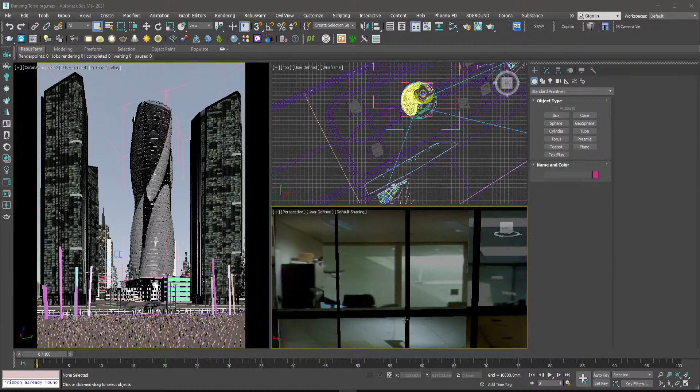Yeah, I'm not sure if this is what we worked on last time. Honestly, I'm a bit confused because I had two versions of these files. One I'm working on for the client, so in case I want to go forward and get it done, we probably will have another version or something. But for the live stream I always had a version too, and that's if it's also original or something. The one for the live stream, I remember we textured some part of it last time, but what I'm seeing now is so different. I'm surprised. I'm just going to continue with the original. I can see we're on the same page with the original file and the live stream file, so I'll just continue with this and probably overwrite the one for the live stream.

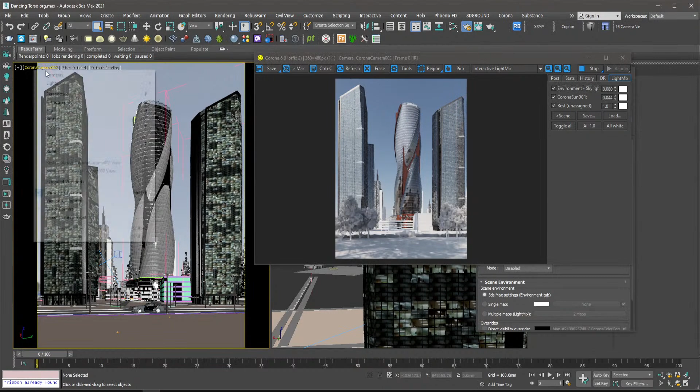Okay, I think maybe I auto-saved it on the file for the live stream. Yeah, this is the one we're working on, so we'll just continue on this. While working on the last live stream, I mainly used this camera. Let me try switching to the other camera to at least see what we have. Okay, not bad on this camera as well.

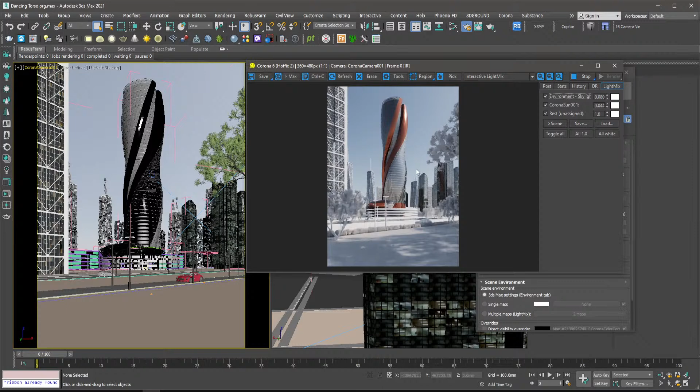Hey, cool, excited about this. It's just something like that. I'm going to texture this building. I think the ones I just adjusted are good for buildings and they're already looking okay to me, so I'm just going to adjust for this guy as well. Now for this other build, let me just stop this so we can talk. This is it. So for this guy right here, this white part, I think I would love to use concrete material for this. I'm just going to open that selection.

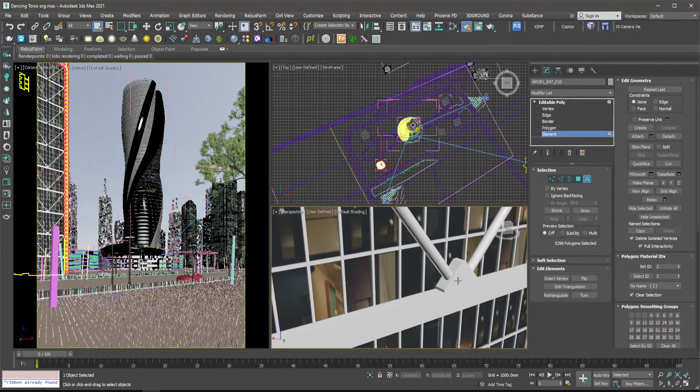So with what I'm seeing now, the concrete and the metal material I have in mind, they are both one object. So what I'm going to try to do is select the concrete and detach, but once I detach, because this object is an instance object, if I make the mistake of detaching this material, it's going to disappear from the other instances of this building. So to prevent that, I'm going to go with a different method.

If you come to this side, I'm going to introduce you guys to multi-material objects. The way multi-material objects work is through set ID. I don't know if you notice it, but this whole object has the same ID, and the reason is because the same material is applied to this and this as well. So multi-material works with IDs. Let me show you.

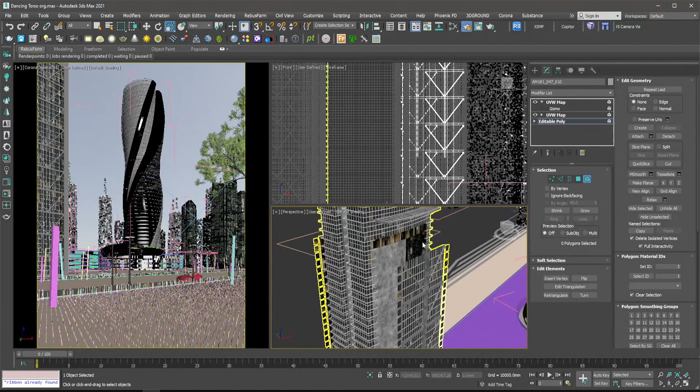Now if we had gone with the decision to detach this because we want to apply concrete here and metal there, if we had detached this, we would most likely have had this area disappear on this model by now. In case you don't believe me, let me try that since we have Ctrl Z. I'm selecting this, going to the UV, the Edit Poly, selecting this, and once I press detach, see, we would have been faced with this issue right now, and we don't want that. That's why we have to go through all that.

And once we are done with that, like I explained when I was starting this project, I will only be using grass, scattering grass models on the foreground. Every other part of the project will only have a grass texture attached or applied to them.

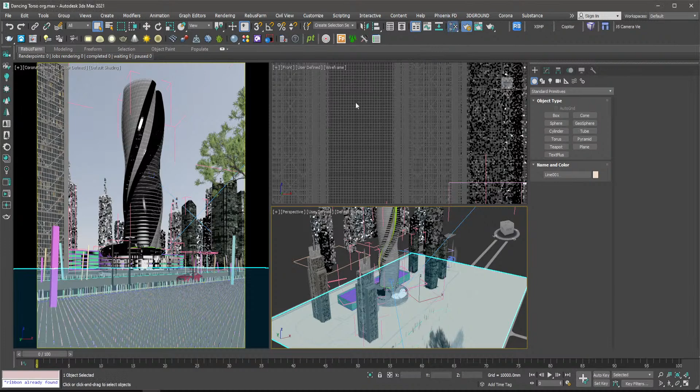So I'm just going to create a grass material, nothing fancy, and I think I have some grass textures I've used in some projects before.

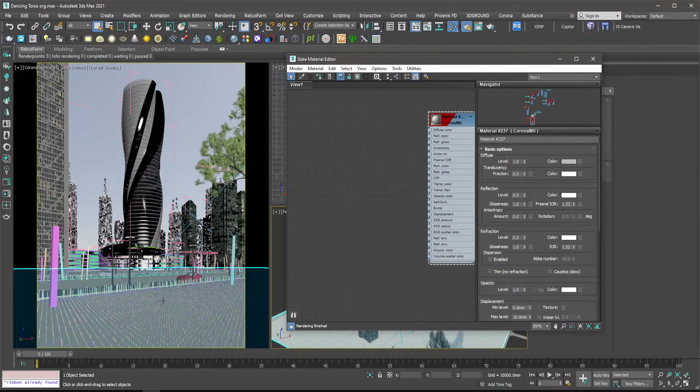We have to be careful of the sizes of our textures as well. If you have something that is not so high poly, by that I mean not 4K, more around 2K is just perfect. You don't need to take it too high, because like I said, these areas are far away. If we were to scatter grass models everywhere, we wouldn't even be seeing the blades of grass in that far area. So why go through all that stress for nothing?

So I'm just going to look for a ground map. I have this one, I don't know, it's looking good, but would it be perfect? Let's see, maybe we have others. Let me see this guy. Can we go with this one? Cool, so yeah, from some of the libraries maybe this guy will work fine. Okay, this one is perfect. I don't want something looking too good, but this guy, okay, I'll go with this one for the ground grass.

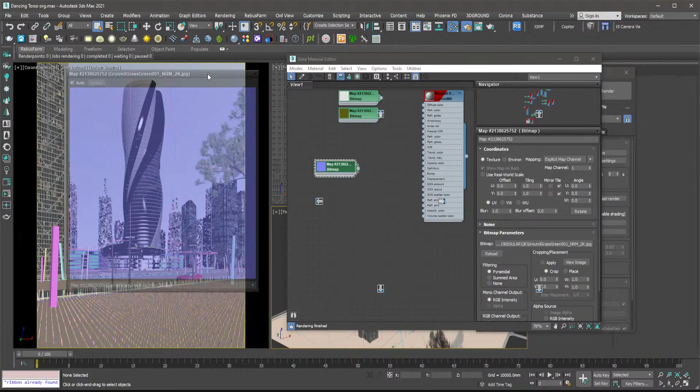Bump map is usually a grayscale map, but normal map looks different and holds more information. If I were to rate them: bump map is a grayscale map, then if you want more detail, normal map, then if you want even higher detail, displacement map. I'd arrange them in that order.

There's a way you can use normal and bump map together to drive a very realistic result. So I'm going to use another technique. For the bump, I'm loading the bump map as well, just to show you guys how it works. And one more, that's the glossiness map.

So we are going to attach this. Now you see how it looks, and you see the work of the normal map.

Just like in Photoshop, this composite map works the same way layers in Photoshop work. It has the same, more or less, mix modes — I don't know the exact number, whether it has more or less than Photoshop — but we use all these modes to mix two textures or something together.

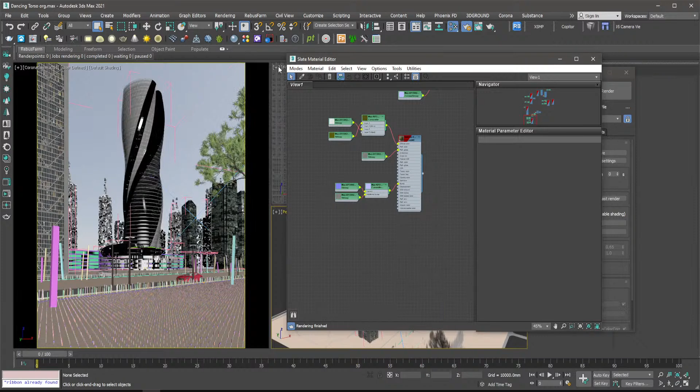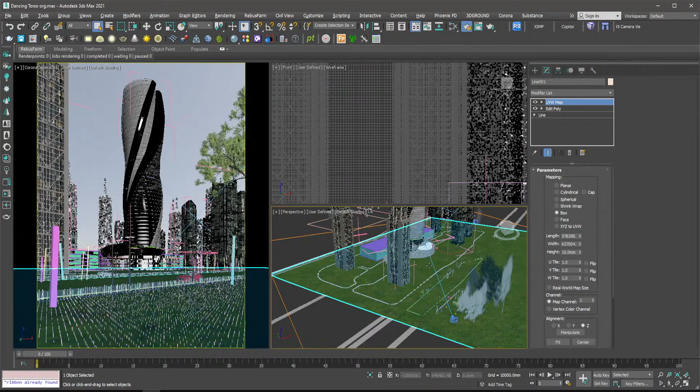So let's just take this back. Well, we have our floor material, so let's apply that. I'm going to apply this, and then I'm going to add the UVW map. So you want to scale this down. You can scale it to this value here, but then I want to be faster with it and stuff. I think this is okay.

Now, one thing I would like to point out, one detail I would like to take, is when you're working on a project and you have these vivid colors in your scene, you end up seeing what we call color bleeding. Like if I have a floor in a visualization, I don't know if you guys have noticed it. Maybe you apply the floor texture to your room, and then after applying the floor texture to the room, your white wall starts looking a bit off, it starts having this yellowish tone or something.

Now that is color bleeding, and the way you can fix that so that you can have correct white and still have that nice floor you want is by using this material called Corona Ray Switch material. I'm trying to remember what the name is on V-Ray, or is it VRay override? Well, I just save this out.

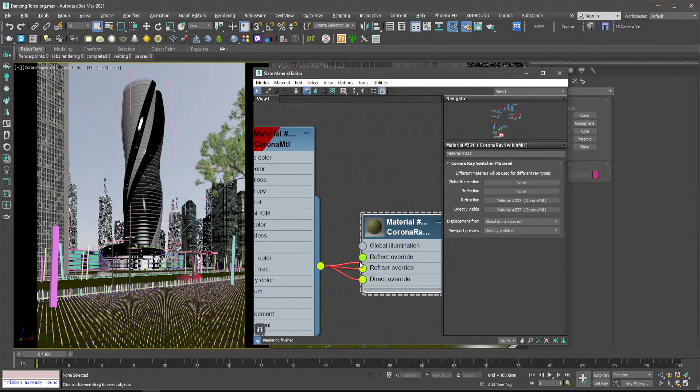So to prevent that, you want to have a different, preferably grayscale material in your global illumination. This is the way to use the Corona Ray Switch material. You put this in your direct override, reflection override, and refraction override. You create a new Corona material.

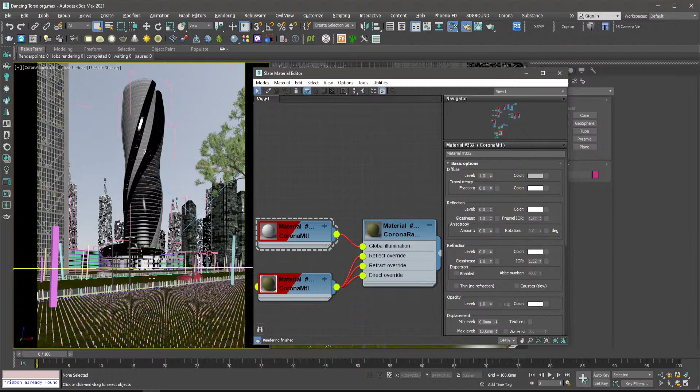You don't need to change any parameter because this is just grayscale, and then you put that in your global illumination. It means when light bounces, let's say on this grass texture, instead of that light taking some of the green color from the texture and bouncing it off, it instead uses this grayscale material, and neutral gray won't have any effect. It won't change the color of anything in your scene.

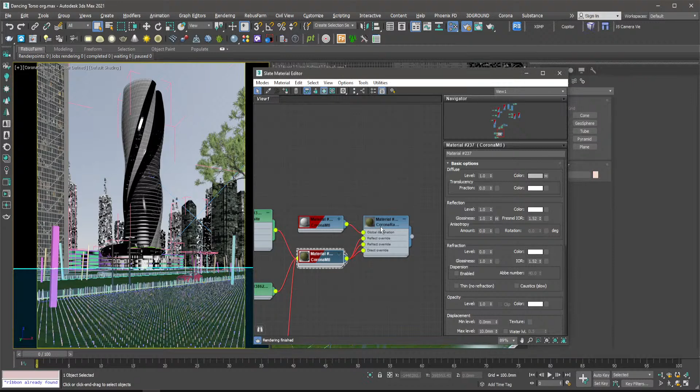So that's a workaround. Now after doing that, because we had applied the Corona material before on this, we need to select that material again and apply the Corona Ray Switch material. It will show up as gray, but you can always select this just to see your texture back.

Now let's exclude the floor, the ground, and make it render just to see what it looks like. Give that some time to load up. Let's see, the red material, is that it?

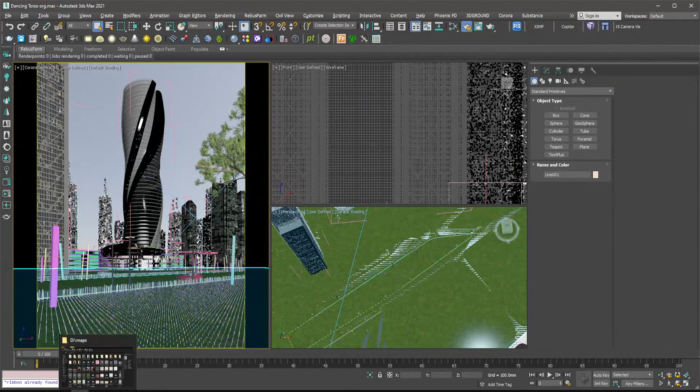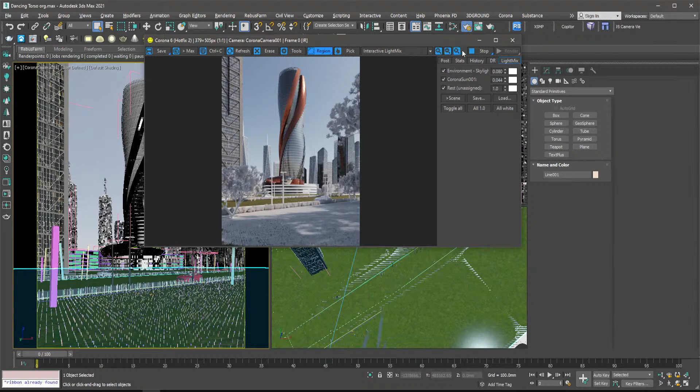Okay, now let me see how it looks on the second camera, because that one shows more of the classic view. Perfect. It's not showing right now because we have our glass, so...

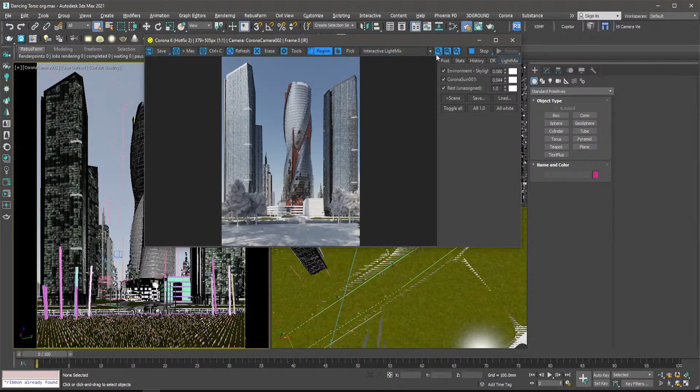I think I'll do the road next. So for the road as well...

I remember the first time I was going to do the road or something, I was going through this long method. I was eager to learn what UV unwrapping was all about, so I was thinking, maybe when I select the road, UV unwrap it, put the textures in Photoshop and whatnot, and it was just so stressful.

And UV unwrapping is no easy thing. UV unwrapping is different from UV mapping. UV mapping is straightforward, but UV unwrapping is like you have a box and you're unwrapping that box. You don't want it to be a box anymore. You want to make it 2D, paint the texture on it, and then wrap it back. It's complex in a way.

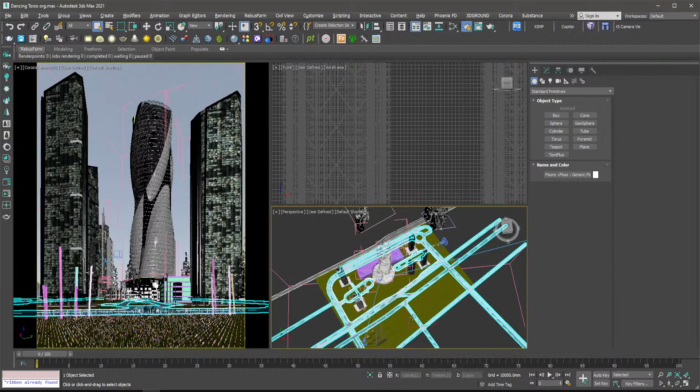It's complex. So what I now found out is that I can just apply an asphalt material on the road, and for the road markings use planes, or other techniques. It's going to be straightforward and easier to do. I'm going to apply plain asphalt on this, without bumps or anything.

Let me go to my map. I think I have some asphalt here. City Street. I just need a plain asphalt road, not one with markings. I don't need markings, just asphalt. Cool.

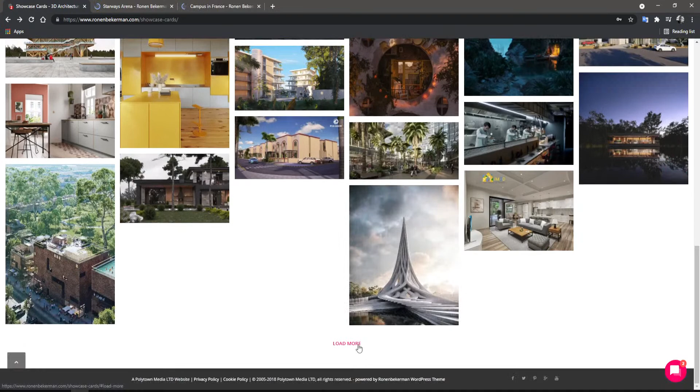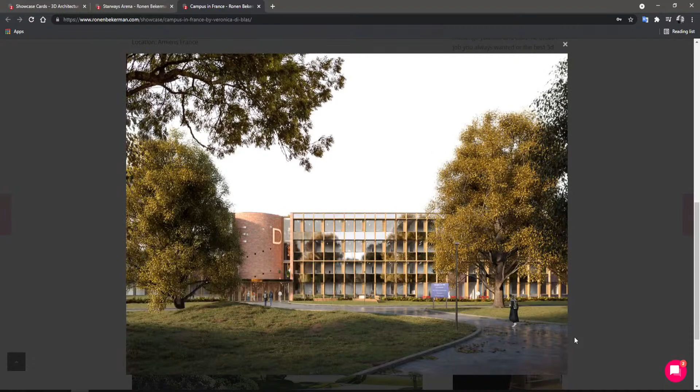I always love an atmospheric render. Though renders with fog and everything looking a bit moody, stuff like that always looks great. I think I've checked this guy before.

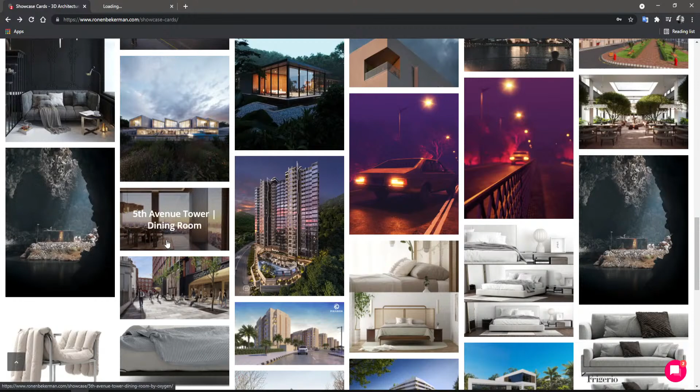This guy's taking forever. It seems to be punishing me for working for so long without saving. That's what's happening. Fantastic. Come on.

Hi, Omega Render. These guys are good. Go see their website. I stumbled upon their website one day and I was so impressed. Look at these guys, just look at these guys.

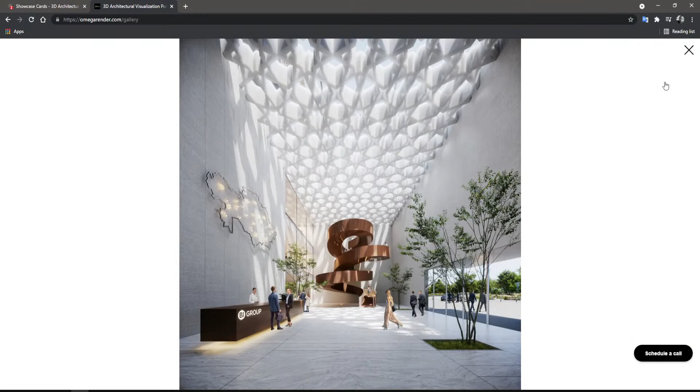Look at these sweet renders. Definitely some photo montage going on here. This could be the rendered elements. Oh my.

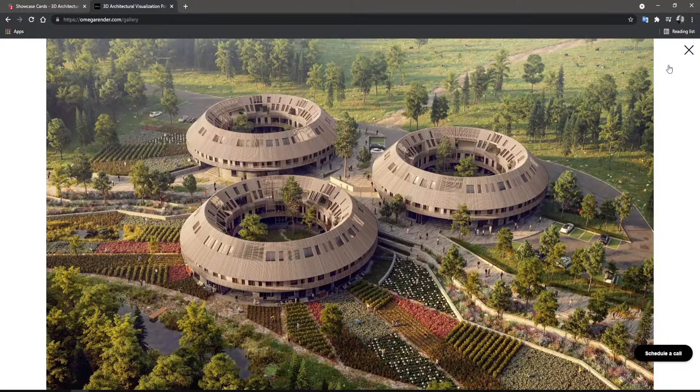This is another favorite of their work. I love this image. Diverse vegetation is just something cool to look at. Love this too. This is my definition of simple and sweet.

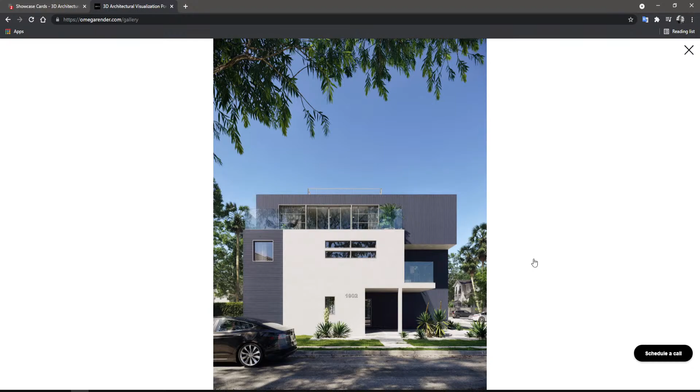My, okay. Now I really hope don't see. Oh God. What's happening? Come on.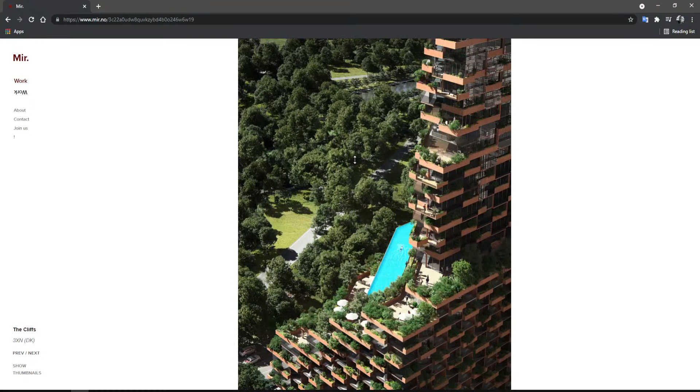Yeah, this one looks like a section. It's a very great idea for a section, I know. Look at that.

I think that's the end. Finally, at last. Yeah, good. Okay. Let's come, so...

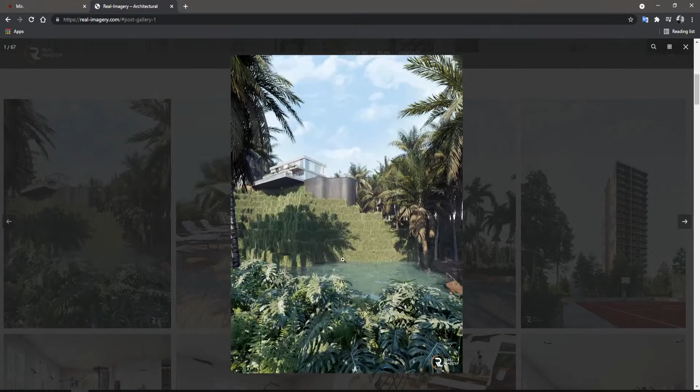It's a collection of some jobs I've done over the past few years. This is a personal project I'm working on right now, I haven't had time to finish it up. I'm planning on doing the interior renders for it as well, so I just have 2 images from that project done already.

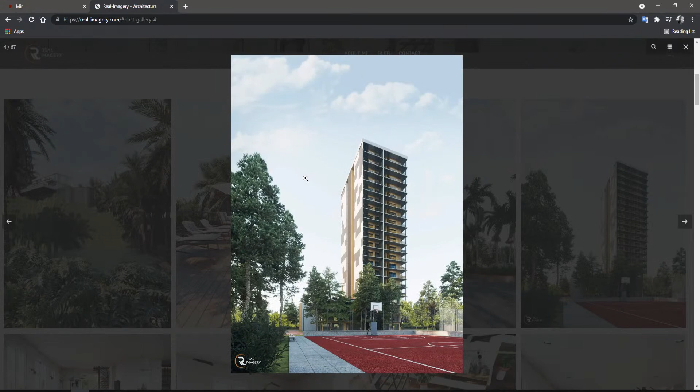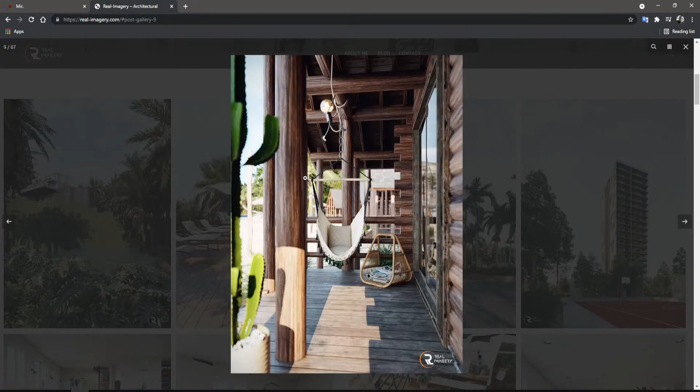So here are some of my works, I really hope they look good, at least a bit. This was a personal project as well, I've always wanted to do a beach scene. I remember I started this project about 4 years ago, worked on it a bit, got stuck, and left it untouched. I took it up again this year and was able to complete it.

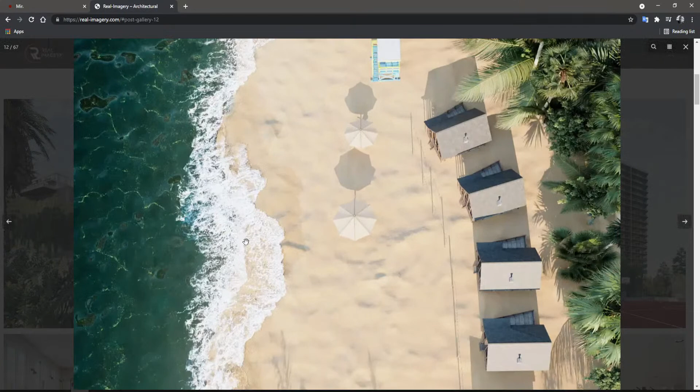Now these sea foams you guys are seeing, I had to be clever about it. They are just planes with sea foam texture mapped on them. I had to work with it in a clever way, because it would take a toll on my laptop if I were to use CFD to simulate sea foam.

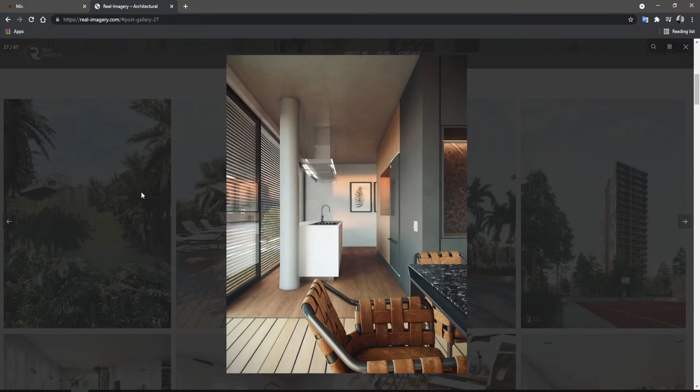This project, also a personal project, a beach house. It's an existing building that has already been built, so I fell in love with images of the building and wanted to make my own renders of it. This is what I came up with.

And this one right here, I'm going to show you something I'm proud of. This was the first project I used to test out render farms. I submitted this project to Rebus Farm, and I think for that month they selected my work as featured, like a featured project.

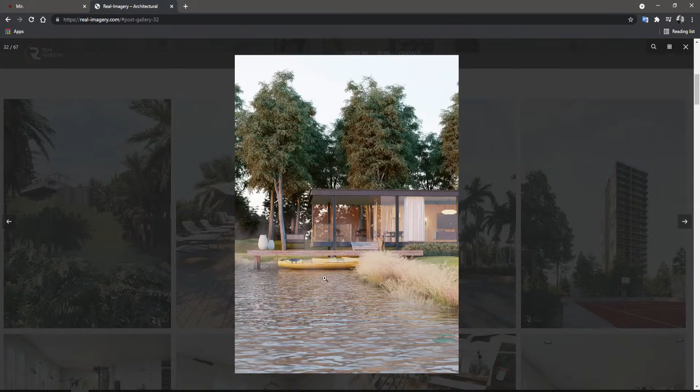Anytime I'm working and I see that, it gives me this joy, it's more like your work being recognized. It's so nice. So yeah, our asphalt is done texturing.

Let's have it excluded as well, and let's see what everything looks like together.

We are getting closer to finishing this project, guys. Honestly, we're getting closer.

By next week, on the next live stream, I'm going to be finishing the texturing for the main building, with the parking lots. Texture that, then texture the auxiliary building, the building attached to it. And for that building, I'm going to be using some tweaks.

I want to make it look like a supermarket without actually populating the interior of that building. What I'm going to be using is getting pictures of shopping malls, applying them to a plane, and then using that plane as a Corona light material, so that by the time I arrange it in the building, it's going to look like a shopping mall from the outside, even though there's nothing showing inside.

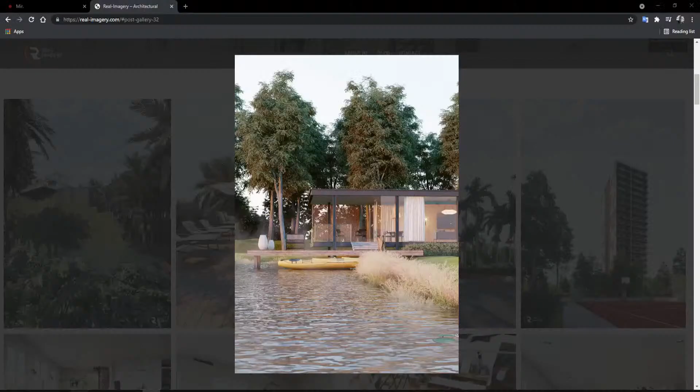This guy just needs time to get started on the rendering, so I'm just going to continue this work.

I did this project on one of my very old PCs. Definitely not the best look. Yeah, this vehicle is floating. I don't know if it's exactly floating.

But then I could say this project helped me understand Forest Pack a bit more. I wanted to create this part that looks like the vehicle just passed on it and stuff. Probably if I'm doing this project again, I'll do it better - what I just did right here would look better.

And this was for a friend for his master's thesis. It's an automat, and I had fun with it. There are other views as well, but I'm not showing all the views on my website here. This is a personal project as well. With personal projects, I learn a lot, so that's why most of the images you see on my website are personal projects.

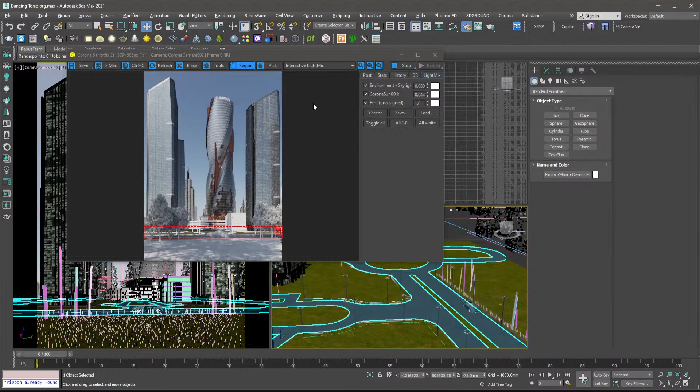I'm a bit confused now. Yeah.

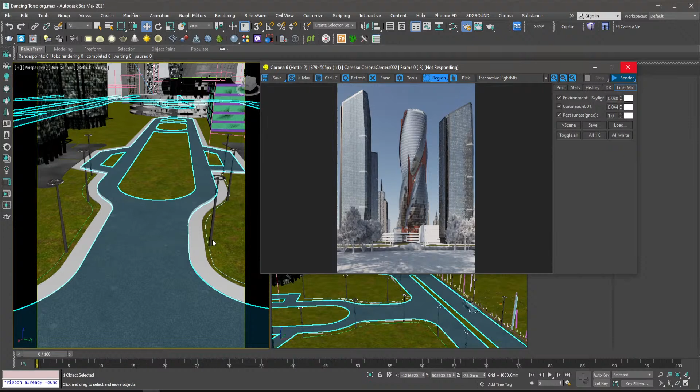Want to get a closer look.

Oh, we have the texture showing the right way. I think the whites we are seeing there - whites from the curb - that's what we are seeing there. If that's the case, let's apply concrete material to the curbs.

Like this. Only a less big block.

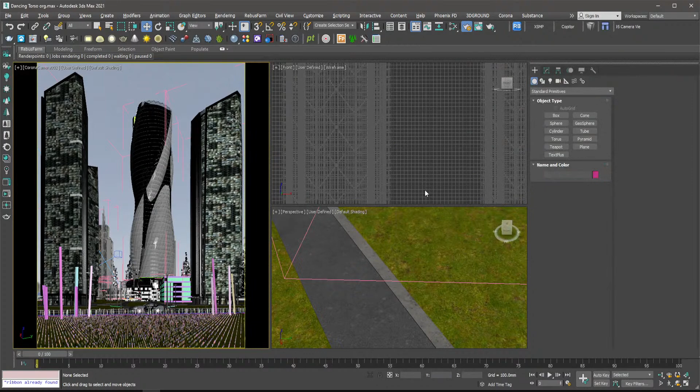I think I'll just find the texture for the base of these buildings. We'll just use that same template I used there. I don't need it to be so much. That's one of the right stuff.

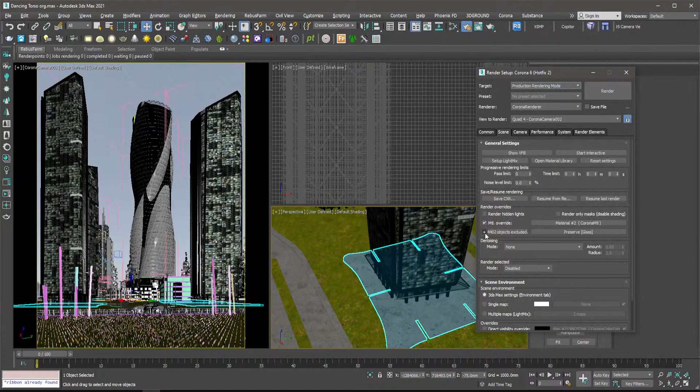Let's make it bigger. Minor draft, and then, after checking the progress, we can probably call it a day for today's stream.

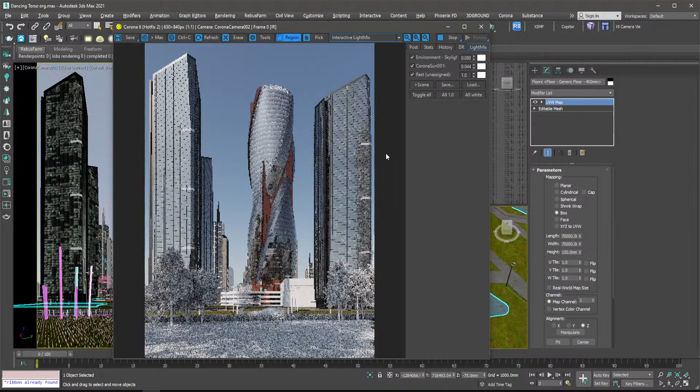Okay. I think in the way I can see, I'm getting closer to achieving the vision I have for this project. On the next live stream, we'll do the remaining texturing of this area, then get to the grass texture as well, so I can make it perfect.

I don't know, let's save it. Let me draw something now.

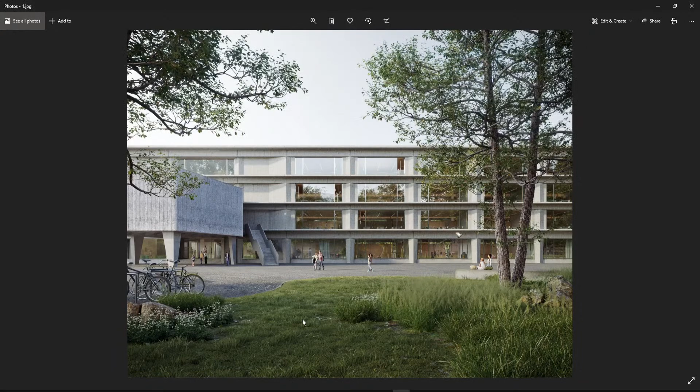While going to a website one day, I came across this grass distribution. Now look at how interesting this is. That's something - maybe add a little bit of work somewhere, have some tall grasses just to make it a bit more interesting.